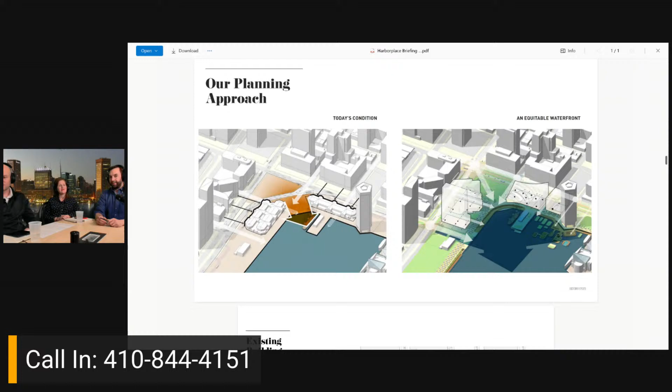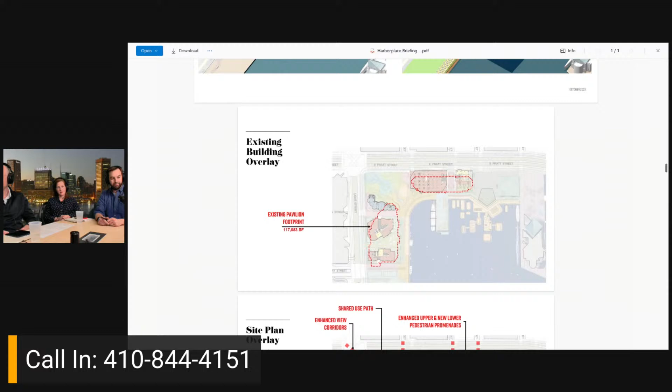So why don't we take you through some of the designs here? I think the next two slides are important because, to Claire's point, the pavilions today take up a lot of space on the ground - they're big buildings. So what you see superimposed underneath are our proposed footprints, which if you slide to the next slide, you can see we're decreasing. Those underneath the little markers are the new footprints.

The idea here is these buildings are kind of hogs to the ground plane. We're decreasing the amount of space on the ground that's enclosed by buildings, and we're taking roadway space to create public space that people can walk on, bringing that park back in. So we're adding an enormous amount of public space, and it's all public space at the ground level. In totality, you're giving back public outdoor space, and that's exactly right. Additional public outdoor space.

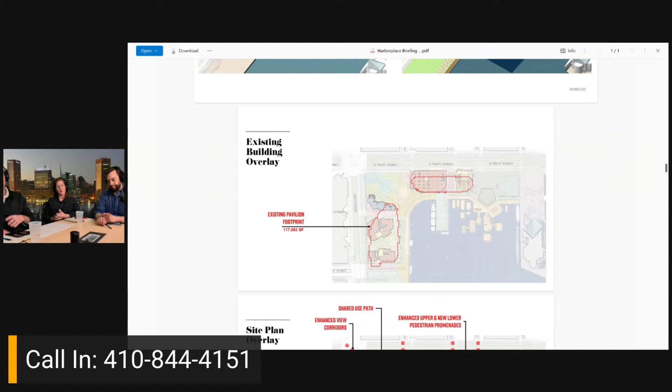We have some great side-by-sides up on the website that show this. We're extending the city's street grid to the water, so if you're standing a block or two off of the waterfront, now you can see through to the water instead of seeing the Pizzeria Uno sign.

I was very lucky to be invited to the Department of Planning's comprehensive plan meeting for downtown Baltimore. There were many designers, Baltimoreans, developers, and representatives from the city at that design charrette. I think the biggest takeaway every group came away with was let's prioritize pedestrians and deprioritize the vehicle. That's what this plan seeks to do, both in the public realm as well as the right-of-way.

If we go to the next slide, we'll take a quick walk around the Inner Harbor. This is standing in front of West Shore Park. Again, lots of shade, lots of places to sit that don't exist today. The idea is West Shore Park is this amazing space that can be programmed. We think that West Shore Park and Rash Field are an amazing component of an interconnected park network, so it's not just this space, it's the entire area all the way around the harbor.

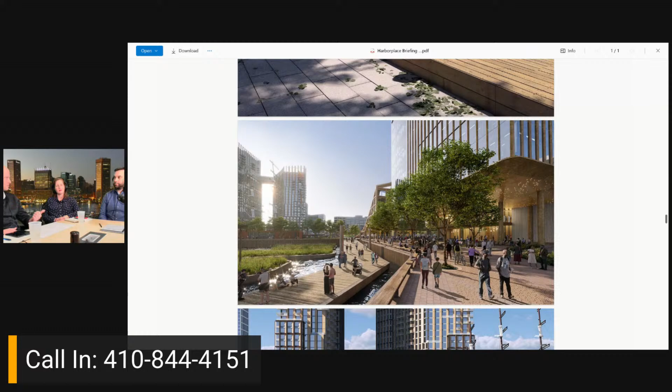Imagine—and it might have been you, Desmond, who said this to us recently—what if kids could come down here on a field trip, and instead of grabbing lunch and going back, they could go for a swim. That's not something we were able to do as kids in this water. But maybe the next generation can, and we should strive for that. Thanks to the efforts of the city, the mayor's office, the Waterfront Partnership, Healthy Harbor, we're close. That's within reach for us.

Can I add to that? We sometimes position this as the fun slide—swimming and boating and stuff—but I think it's a lot deeper than that. Some of the civil rights issues in Baltimore were about access to swim skills and pools, because it is hot as hell in the summer and we need to cool ourselves off. That's going to be an increasingly existential situation here in Baltimore. So it's about access, it's about recreation, it's about activation, it's about learning the way to use the water that it would have always been, previous to probably 75 years ago. I think it's a really deep moment in the plan. Lots of options and fun. There's nothing wrong with fun, but it's also connecting to something bigger.

Yeah, if people are freely swimming in the harbor, we've come a long way. I'll get in. I know folks jumped in last fall, and I know there's a plan to do it again this year.

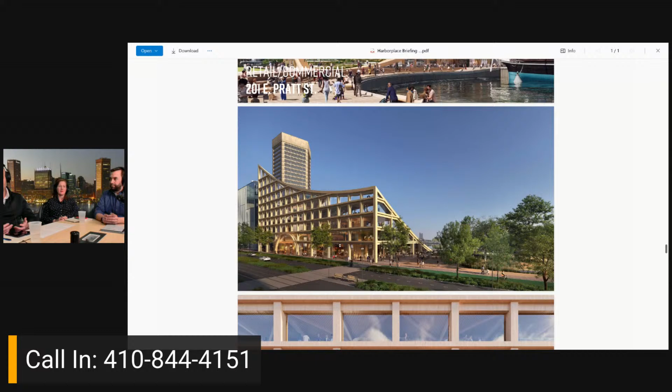In our plan, we want to decrease the amount of vehicular lanes. We want to add transit. We want a continuous protected multimodal pathway, a much larger, more gracious sidewalk. And then we want to invite people into this building. That arch you see, and the next image, is really meant to invite people in and say, we want you to come in here.

We want you to see these small tenants. We want you to come grab a great coffee from Matriarch, or a crab pie from Crust by Mack, or get your all-day breakfast from Saturday Morning Cafe. We want to showcase the best of what Baltimore has to offer, and we think this building can do that.

We think 3XN, the ultimate winner of that design competition, did a great job with their design. But it's important to say that not only 3XN, who was voted the world's most innovative architect in 2022, but some of the other biggest names in worldwide design all came to Baltimore to pitch on this site. That should tell Baltimore that we deserve world class, the most amazing designs that can exist, because these are people who work for sovereign wealth funds and design for governments. They wanted to come to Baltimore and help us re-envision what our waterfront can be within the construct of what community engagement had told us.

It's really important, it shouldn't be lost on us. It's a unique building, you're not going to see another one like it. That's what gives it an identity. I'm more of a structured guy, but I want to see something that, if I'm flying over in a plane and I see it, I'd say 'oh, that's Baltimore.' It's unmistakably Baltimore, and I think that building will accomplish that.

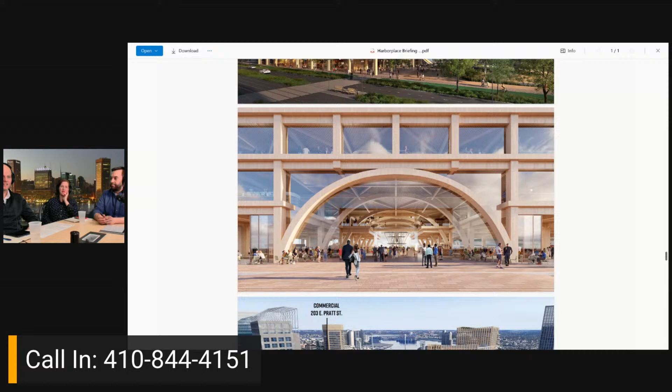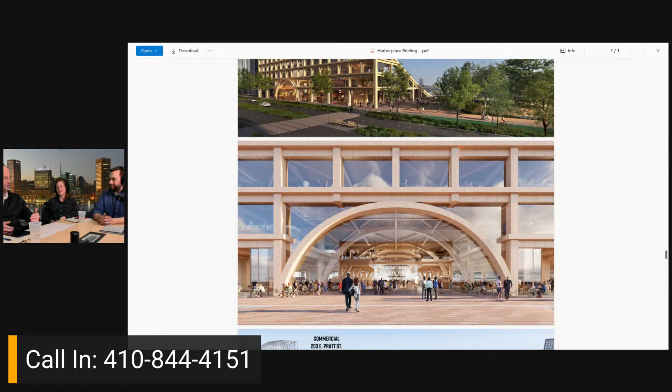Adam, can you talk a little bit about these international firms? What parameters were included in that packet? The answer is, we said here's the parcel. It's bound by Pratt Street to the north, the water to the south, and you saw how we arrived at our planning methodology of extending the street grid to the water. That created a four-sided parcel, and we said, here's the parcel—it's adjacent to this amazing park that we want to be the center of activity for Baltimore.

We're looking for a building in the 5 to 8 story range. We don't want it to be too big given the surrounding space behind it. We want it to be incorporated into the fabric of the city, authentic to Baltimore's materials and story. We want to create an elevated place where Baltimoreans can freely come up and use the space as they please, and a place that showcases great local vendors and everything Baltimore has to offer, both to residents and visitors.

And that quite literally was the design brief. So what we did is we met many times with all of the design teams. We gave them not only the first 30-day community report, but our 60-day report, which came out right after the September 30th meeting. It's really important to note that they read these documents. People from outside of Baltimore not only came here and walked the space, but they digested what everybody in Baltimore had to say, and I think that's what yielded the design you see here today.

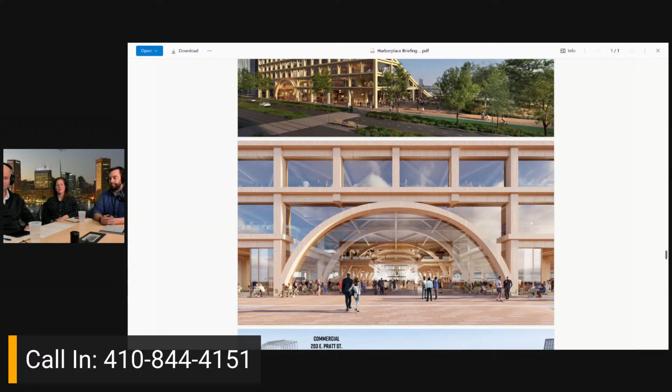Moving on to the next building, 203 East Pratt Street. It's a very traditional commercial building, sitting next to the Sail. I think it's a really great companion from a design perspective, but ultimately this building serves to provide a world-class commercial facility on the water.

I feel bad for 203 East Pratt. Every time everyone gets done talking about the Sail building, 203 East Pratt gets no love. I love this building though. Yeah, I'm starting to, because nobody else is. It's the quiet one. I come from a big family — the quiet one is doing really important, unifying work. There's probably a sheriff's office in there doing something really good. Well, this building has some really great elements to it, and yes, I think it doesn't get a lot of love, as you say.

It's funny, the designer from Gensler who worked on this had a little bit of a chip on his shoulder too. But what we wanted to design here was a companion to the Sail, something that honors that building but isn't identical to it, because that would feel contrived. If you look at waterfront developments across the world, you can't compete with it — it's like the bridesmaid's dress. And 3XN might get mad at me for saying this, but they did design a companion building next door for that parcel, a continuation of the Sail. It's a beautiful structure.

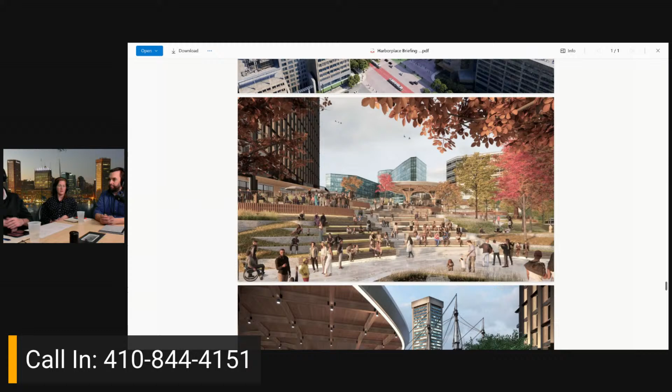But then we also thought it was really important to have some type of food vendor or outdoor bar space. So on top of that amphitheater, and in the next image, you can see, again, trying to create that differentiated perspective where today you can't see the water from this level. But we want you to be able to look out over the constellation and look down the harbor from this perspective.

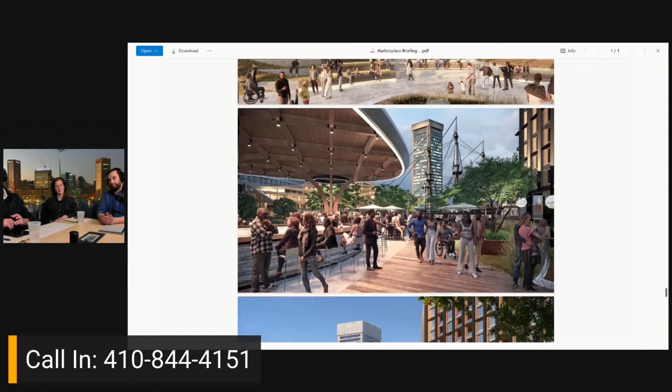And then just what I thought was a really cool design move - BCT Design Group and Sulton Campbell Britt kind of collaborated with Claire and her team on the amphitheater and on this. But underneath, in the next slide, we have about 8,500 square feet of what we call experiential retail. So that's sitting under that amphitheater and under that outdoor space on the left side there. Okay, I didn't realize that.

So BCT said, hey, Baltimore's all about its crabs, but what about oysters? They're kind of the poster of seafood in Baltimore. And so they came up with this idea of a wild set of oysters and how oysters kind of stack organically onto themselves and build up these hills. And the inspiration for that was really looking at Times Square in New York. Times Square is active all the time, right?

Yeah, but one of the craziest things that we talked about in numerous design meetings is they put in a set of red risers, plain old bleacher seats that you could get anywhere else. And you cannot find a seat on those things. Never. And so doing something really simple, like just creating a little bit of space where people can sit and be at a slightly higher perspective and watch everything go by.

Is a place where people want to be. I mean, people eat that up. I worked on 50th, on 7th Avenue between 49th and 50th, about 8 streets up from the center of Times Square. And you're right, it's an active place, not just on New Year's Eve. It was active every day, but people do like to get different perspectives on things. Like going to my neighbor's house and sitting on their deck because I get to look at my house from a perspective I don't see very often. It's interesting, people always like that. A friend of mine down the block, EJ Cocker, shout out to you, had a boat and he would take us out onto the harbor to see it from the water. It's just a different perspective. To the extent that you can create more of those opportunities, because right now we just have a bunch of red bricks and you're getting beat up by the sun.

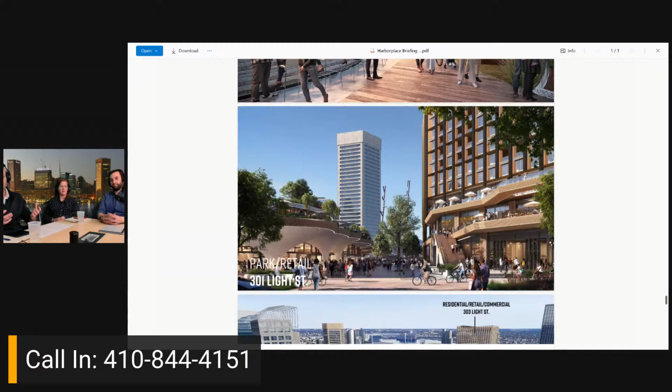So basically 303 Light Street on the next slide is 2 levels of publicly available commercial space, very similar to the Harborplace Light Street Pavilion. Yeah, perfect—so we've got 2 levels of public commercial space, and above it we have residential.

But we talked about that, right? It's the same idea as the Festival Marketplace being an activator. This is ground level retail mixed use with residents above. That building on the left, 414 Light, is almost fully occupied at this point. And people love being there, even without a comfortable way to cross the street, as you said.

So imagine if there's a way to have more porosity across downtown, more accessibility. What's going to happen? I stood out there, I had my cameras out there. In 2.5 minutes, I saw a family get separated. They thought they could go, two or three of them turned back, two of them kept going. Luckily the car saw them going down and slowed through the intersection, but the two kids got to the middle of the median. Thank God. The other half of the family was here, I barely had a chance to turn around—there's a fire truck barreling down. It's just tough.

So I had to think about it. You guys are here in my studio, so you know where I am. Pimlico Racetrack is right across the street, right across Northern Parkway. When I get up to take my son to school, I'll see those horses galloping and warming up in the morning, and it's just a majestic sight. I'm thinking, man, if I didn't have to cross Northern Parkway, I'd be over there with my coffee on a regular basis. It's literally less than 1,000 feet away. But I'm not going to get up at 7am and think I'm lucid enough to get across Northern Parkway safely.

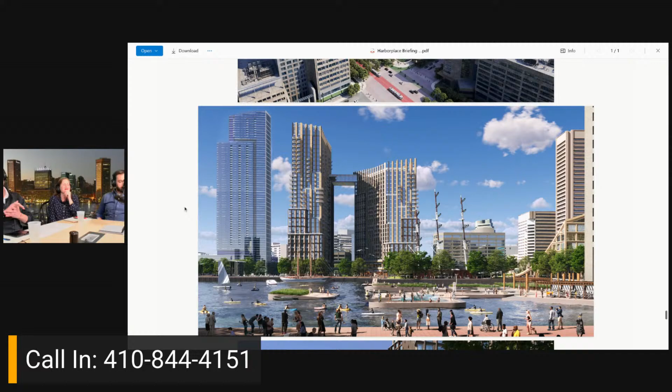It shows our conception of Light Street, which is 2 lanes in either direction, with a multi-directional protected lane. It's a small thing, and when you say it, you think, well yeah, duh, but it doesn't exist. There is not a protected mobility lane from Camden Station to the harbor.

We're a city that wants to get people out of cars, as cities reinvent themselves. We still operate under come in on 95, come down Conway and park, leave Conway, cut through to 83 and vice versa. In this plan, you could get to DC and back on your commute without ever having to get in a car. You could ride a scooter, ride a bike, get right up to the station.

You could walk. From that building, it's just two blocks over to the Camden line, which goes right in front of Camden Yards, and you're on the Camden line all the way to Union Station.

That's right, DC. And I think it's also important to note that it's not just about connecting to Harborplace, it's that larger accessibility conversation, where you can get from the train station down to the harbor. Now you can get from the harbor to Harbor East, or you can get up Sharp Street to Lexington.

I can tell you all the stops on the MARC train, because you're going to bring those folks up now, right? Whether in Laurel or New Carrollton or wherever, you've got people that can realize it's an easy walk from Conway.

I don't know, maybe the island can go away, and that would be a protected walk or something. But I think there has to be something that connects. It's a later conversation, maybe part 8 of our talk, but I have some ideas.

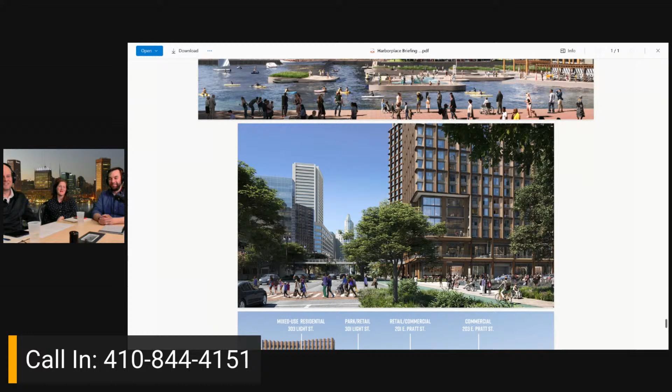We think the sail is a super unique and iconic element, but the design really fits into the existing fabric of the city in terms of its skyline, enhancing views, and creating a new world-class waterfront for Baltimore, similar to how waterfronts across the globe are reinventing themselves, especially post-industrial cities. So 303 Light Street is the mixed-use element, the park at the center of downtown—the Park at Freedomsport—the corner of Light and Pratt, 201 East Pratt Street, the Sail Building, and 203 East Pratt.

The idea here is let's graduate in height down to the center of activity. It's the Park of Freedomsport, the center of downtown—we want that to be the center of activity. And thanks to the governor resurrecting the Red Line, ideally that's a transit stop, so now you can get there easily east-west, and easily north-south. That gets to that accessibility component as well.

And like you said, you're building for the next 50 to 100 years, and as we talked about, the park is never going to be done. There's going to be iterations of everything down there. You've got to have it stay clean, stay safe, stay up to date. The build, everything's going to require money be invested in it. It's not a one-time thing where you just build this and then it's just going to be that way for the next 50 or 100 years.